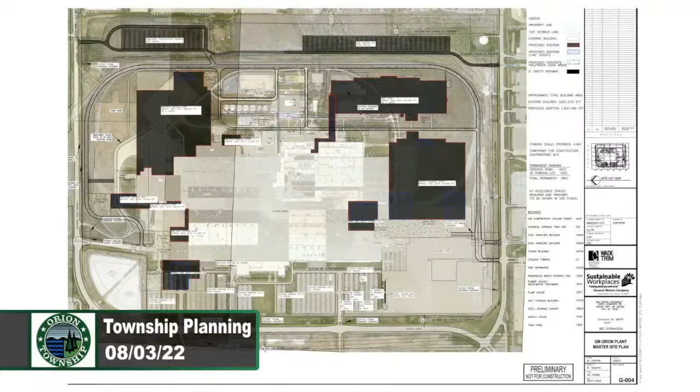All right, seeing no one, I will turn it over... I'm sorry, do we have any letters in regards to this project? I don't believe we received any, thank you. No. And I'll turn it over to the Planning Commission for any questions or comments they have during the public hearing in this case.

I have one question. What is the timing of this project? Any other comments before we switch back to the petitioner? Okay, go ahead. The construction timing is going to be starting next month, or actually this month. We're planning to get permits in place to start earthwork grading, and full production is scheduled toward the end of 2024.

All right, with that said, I believe that concludes our public hearing for PC case 2022-28, Orion BET2 plant. It is now 7:11. I would like to reconvene our regular PC meeting, which leads us to, not to be confused with the next public hearing, but that leads us to our brief public comment on our regular agenda for non-agenda items only.

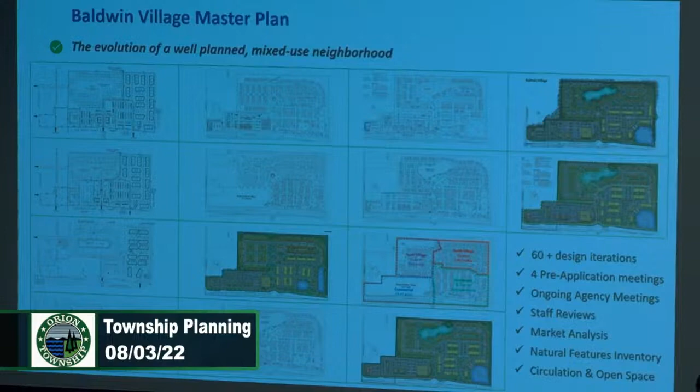Open space, circulation—again, how do we get more? How do we not just meet the ordinance? How do we exceed the ordinance? In terms of location, just so that we're clear, we're looking at about 63 acres of land on the west side of Baldwin Road, just north of Morgan. It is a hilly site.

I'll go into the next slide. It's 63 acres. We now have kind of an unusual right-of-way path down our eastern border with Baldwin and the recent expansion of Baldwin Road. We've got about a half a mile of frontage on Baldwin Road, and so we've got an opportunity to really be a gateway to the community, to be important as it relates to the aesthetics in terms of the architecture.

I mentioned we have 50 feet of grade change. We've got natural buffers on the site, which we've worked hard to maintain—not only for the benefit of our future residents, but certainly for the benefit and care of the existing and adjacent neighborhoods. We're proposing 4 points of access on Baldwin Road.

We've already started and had multiple meetings with OHM, with the Road Commission of Oakland County, understanding really what is permitted, how do we achieve a safe and viable neighborhood.

Interestingly, the traffic study that's well underway now is less about creating volume. Almost every neighborhood asks how many new cars you're going to put in the area—Baldwin Road works really, really well. What we're more concerned about in our traffic study are the finer details: how people are moving, how they're handling these crossovers. You'll see that in future meetings, the actual final traffic study and the feedback from your consultants and from the state and the county.

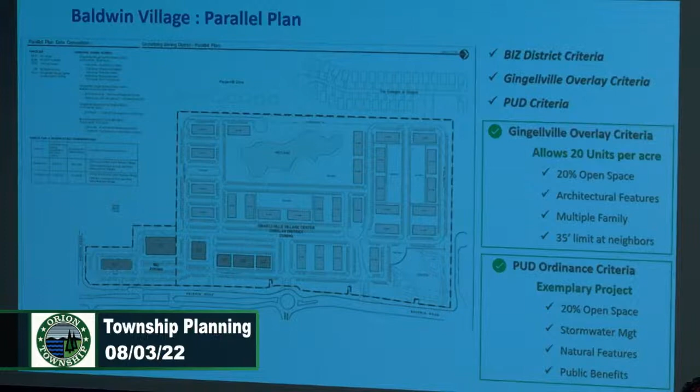We were able to demonstrate that we can provide a total of 672 residential units in a multiple family district. There's talk within the overlay district about single family, and we can get into our interpretation of that tonight. But it's realistic to say that nearly 700 units plus about 115,000 square feet of commercial could comfortably fit on this site. We can still preserve the wetlands, provide the open space, and provide the stormwater mitigation and so forth.

So it's not a great plan, it's not a pretty plan, but I think it's a good litmus test that you guys will use in your determinations, that the staff consultants will use in their determinations of what is available to this site. It's always interesting when we look at new land, it's a temptation to compare what is proposed versus the open space that's there now.

But really what the ordinance looks at is what is proposed versus what the underlying rights of that land are. And that's what this plan does. The takeaway is our density is about 31% lower than what we think could be placed on this site, and our commercial is almost 40%, 39% lower than the commercial that could be generated on this site.

Think about that. It's not only those uses, but it's the traffic, it's the parking, it's the cars, it's the pollution, it's the exhaust. So all in all, we've provided what we think is a very, very green development.

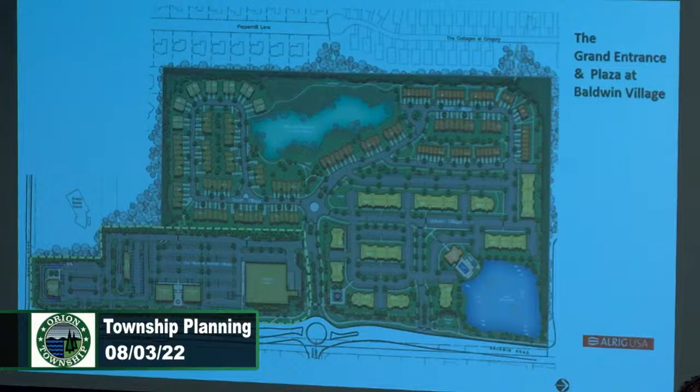I think I failed to mention Dominic Tringali, probably the best architect in the state, is on our team here. Dominic and I worked together and created what we'll see in a minute, called architectural landscape. So we've created iconic structures, images, landscape that's going to beautify and make iconic Baldwin Road and our entranceway.

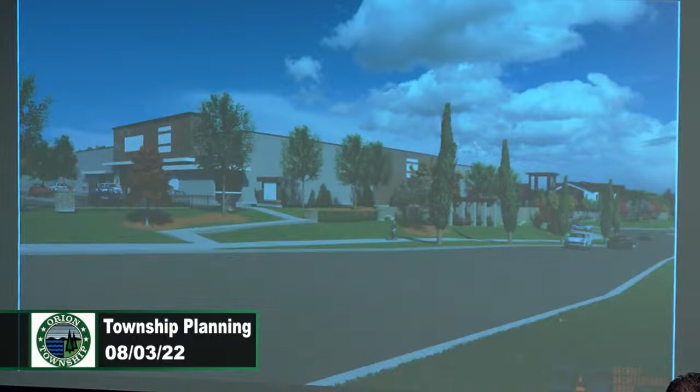This is proposed to be 45,000 square feet, about half or even a third of the size of a standard Kroger. So really a neighborhood market, a neighborhood grocer with an exciting concept. This is one area we'll get to when we talk about waivers. Your Gingellville ordinance says the largest building on this site should be 13,000 square feet. This is 45,000, so this is one of those waivers we'd be asking for within your discretion. All of our other buildings are below that 13,000 square foot area.

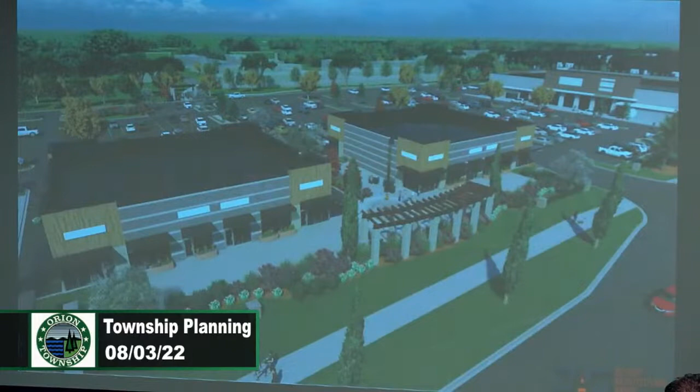As we move further south, we're showing two different mixed-use retail buildings, and I think the nice part about these are the spaces we create outside. This is along Baldwin Road. Again, one of Dominic's trellises. We're picking up all the Gingellville design style guidelines in terms of pillars, fencing, and landscaping. But what this really will become is an outdoor plaza area.

We're envisioning walkability, fireplaces, ability to have outdoor art, whatever the retailers and the community want to do there. These are going to be big outdoor spaces so people can have outdoor dining, outdoor patios right up against Baldwin Road as opposed to hidden in the back.

Here's a view from the back where we've got our parking, but what's important is that these are two-sided buildings, that we're able to walk between the buildings and create those outdoor spaces.

Here's a connection, again, with one of Dominic's trellises and that really beautiful landscape. This is leading from the South Village so people from the Cottages at Gregory, and people throughout our three villages, can all walk to these areas safely, walk back and forth, even go further down Brown Road to some of the other uses. An area of what those plazas in the middle may look like, the fire pit and the frontage along Baldwin.

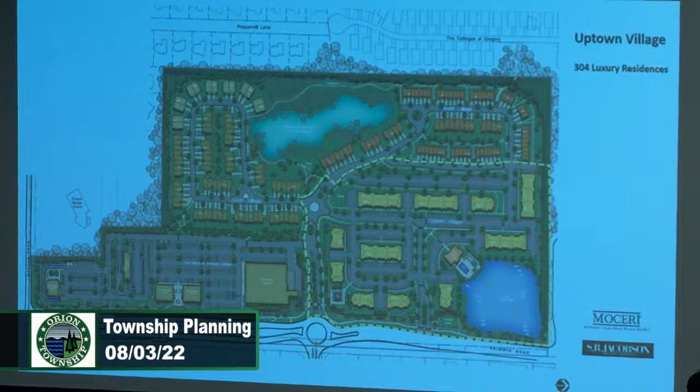Uptown Village, this is our multifamily development. What we're proposing here, again, is through the development and building and then ownership of Dominic Moceri and S.R. Jacobson's companies working together. They've done this in many locations, both in Orion Township and elsewhere, and it really is just a beautiful development. We're proposing 304 residential units within this, and really this is one of those missing middles. These are luxury for-lease residences.

Dominic can provide more detail in terms of cost and qualification, but these are, sadly, much more expensive than my mortgage. These are going to be a great development from a community point of view—homes where people can stay within Orion Township, leave their 4-bedroom colonial, and come to either this or some of our other proposed homes.

I'm sorry, I skipped a little past that. Again, the architecture is really updated, very, very cool, we think—sleek, modern, but still fits very well into the neighborhood, into Orion Township and along Baldwin Road. Many of our colors throughout each development are muted, especially as we move further west toward the existing neighborhoods. The colors get more muted as they sit among the trees, so we have less impact on our neighbors.

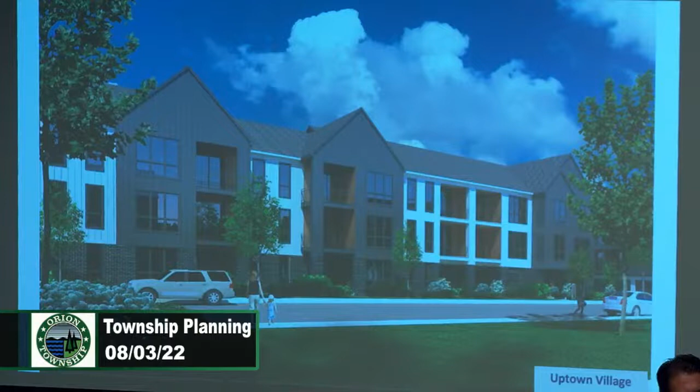Uptown Village will be a full amenity type neighborhood, with a clubhouse, big gathering areas, indoor and outdoor opportunities for parties or showers, and a pool. The pool and clubhouse will be available to all three villages. If you're a resident here, it's located in Uptown Village overlooking that 2.5-acre pond, but it's available to all of our residents. That's looking north at the entrance to Uptown Village out to Baldwin Road and Judah, at the roundabout.

The north and south villages—I'll go through these together. They're similar but different in the sense that some of their architecture is different, their site layout is different. The connectivity, the sidewalks, and the buffers to the neighbors are all consistent and very important. On the north, we're proposing 79 attached single-family townhomes throughout this darker brown area, 79 residences altogether.

On the south side, we've got three different building types—two significant differences, and one really in terms of garages, driveways, and architecture. In total, we're proposing 82 residences on the south village, so 79 on the north, 82 on the south, 161 total between the north and south villages.

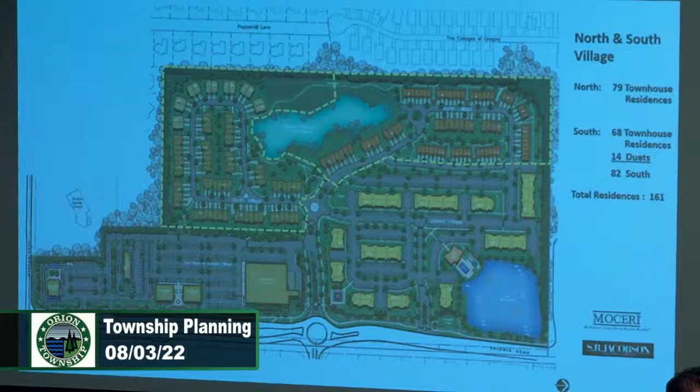About 75 feet of that is on our property, so our buildings are set back varying amounts. Our closest point right here is at a 53-54 foot setback from the property, and then it drops off further back from there. The great part about what Dominic has designed here is these are single-story ranch duets or duplexes, so the profile will be lower—not as tall as the adjacent neighbors' homes. They're not looking at a big multi-story townhouse; it's very much residential in scale and character.

These are the attached townhomes from the North Village—really great buildings, great character and architecture. We very deliberately went with this more contemporary yet traditional, kind of Michigan farmhouse, Scandinavian type architecture, as opposed to that Royal Oak brick townhome look we definitely wanted to get away from. This architecture goes well with Orion Township and our community, and really blends in well with the development and the buffers at the western edge.

Here's a look with the garage units. We'll have units both with front-loaded garages, and many units on your site plan have side-loaded garages on the end. We tried to work closely with your ordinance in terms of garage positioning—just about 50%, a little less, of our townhome buildings have side-loaded garages on their end units.

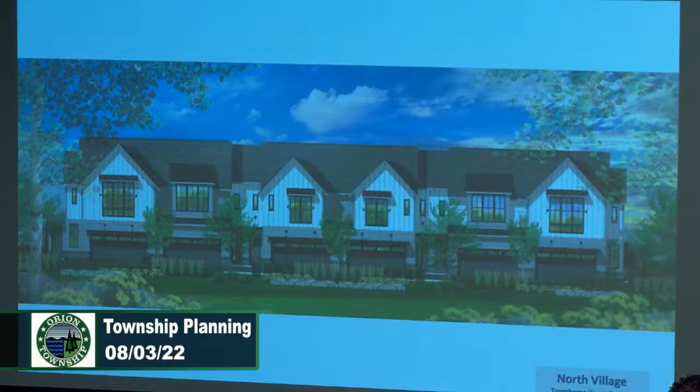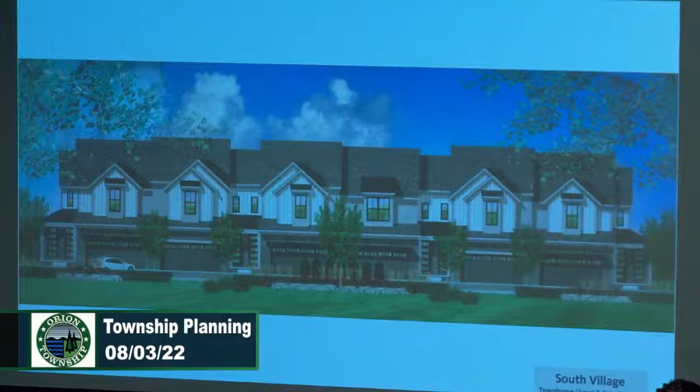Some of the different types of housing. We'll ultimately, through this process, submit full architectural plans, materials, all those different things. But we thought it was important, even at this eligibility criteria stage, to give a full understanding of what the intent is.

Here's a look at that duet unit, or two-family unit. This is an attached single-family home, a duplex if you will, residential in scale, single-story. May have a bonus room or office upstairs. So single-story living, two families. We have 14 of these units all along that southwest corner.

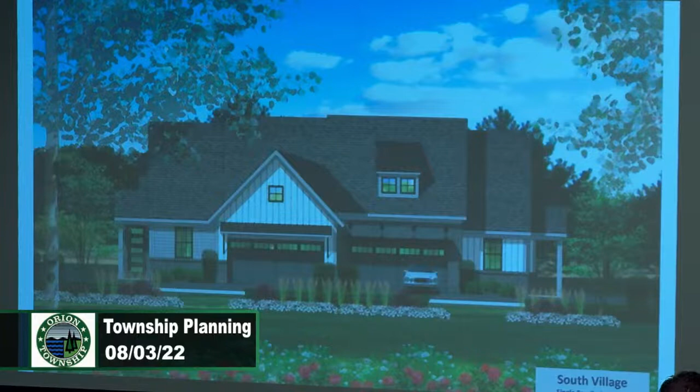Infrastructure, again, this all comes through final review, but it's important to make sure we've got it right now. We've done plans, not with this team, but with less experienced teams over the years, where they say let's just do that, and then we get to engineering and say holy cow, we can't do what we promised. So Steve Pangori, Mitch Harvey, OHM, your teams here, we've done exhaustive studies on stormwater, sanitary, and water. We talked about the traffic study. Tree surveys are underway, and wetland reports and wetland studies have been submitted.

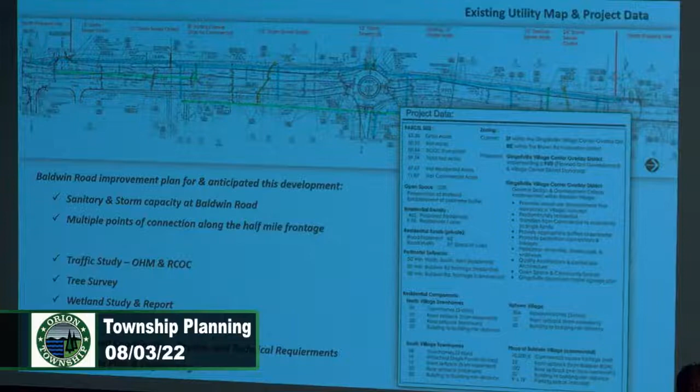We're committed to that continued coordination. It really has to work well, not only for Baldwin Village, but for Orion Township. And we know, given the homework we've done, the site surveying and the work with all the various consultants at play, right up to the state level, that we can confidently say this is going to work, and it's going to work well.

PUD has one more test, and I won't read through each of these, but it's always about a public benefit as well. What is the public benefit? Some of these are very specific, like 20% open space, preservation of wetlands; others are more intangible, like beautification of Baldwin Road and the entranceway, safety path connections, sidewalk connections, trails, and so forth. What Buzz and Randy and the team said is, is there more that we can do for the community?

So we've made the commitment, and put it as part of this package, that we also plan on working with the Orion Township safety path. We've already got the benefit that Baldwin Road put a safety path in front of this property, this half-a-mile property. Buzz and Randy said let's work with the safety path, make a contribution to it, because we know there are other areas in the township that need that connectivity.

We're also looking at, and have made the commitment to participate in, this idea of an accessible kayak launch at the camp up on Clarkston Road, right in the S-turns there. That's a really great use. We've studied the proposals for it, made that commitment in writing, and we'll continue to work with the township to understand how that happens and how we can help participate.

I won't repeat these, but I wanted to come back to them knowing I'd be long-winded tonight. Thank you for your time, but again, just to reiterate, our objective tonight is to help broadcast our belief that we meet the eligibility as a PUD, both under all the various ordinances we talked about, Gingellville and PUD and underlying and BIZ and everything else, and that we took your master plan seriously. We think this is going to be that benchmark, that we'll truly be not only the best new neighborhood in Oakland County, but certainly the best new neighborhood in Orion Township.

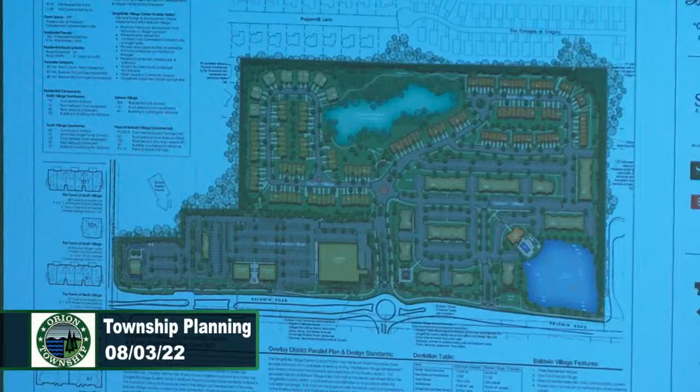Support on pedestrian as a general comment? Okay, well, I would suggest, if someone's willing to make a motion, then maybe we can at least put that motion on the table. There'll be the opportunity for public discussion of the motion. I would recommend there maybe be some conditions put forth on the recommendation, just some direction feedback that we'd like to see improvements on.

I'll make a motion, but before that—go ahead, feel free. One thing I forgot to mention is that the car wash that's proposed just doesn't seem like it really fits in this environment, this type of development. That's my own personal reaction to the project, that the car wash just doesn't seem to fit. And I would say that if the car wash project is scrapped, a mattress store also doesn't fit.

Personal opinion. Good point. What I would like to see in the commercial portion of this would be professional services like a doctor's office, dentist's office, other medical facility. If this is truly a self-contained village of sorts, something like that seems to make more sense to me than a car wash. I think the development where we're referring to the mattress store was purposely designed that way so it can be a lot of different things, but I would like to see a professional building of sort in this development.

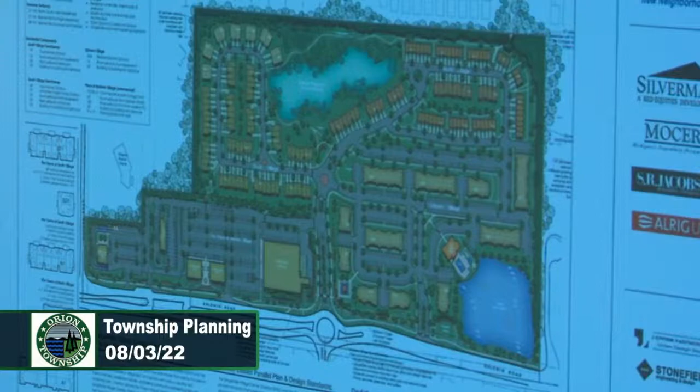You're seeing an aerial, a bird's eye view. This is one thing I've struggled with our team on. I said I'm sick and tired of bird's eye view because we're not a giraffe, and we're looking at something from a giraffe's perspective. We've got to look at it from human scale, from where you are in your vehicle, below the grade, the height of the road coming up, and this gets to the uncomfortableness and what we want to do to bring the scale down.

We're not seeing 3 floors of these apartment buildings—and I'm going to call these apartment buildings because we're trying to provide housing types and options for different affordability levels, call that middle market.

So here's a good example, if you keep the screen on. Did we lose it? Let's try that. Okay, there we go. So this presents—it's beautiful, but you know what, I don't like it, because I'm not going to ever be that tall on a crane looking at the view. We're going to be at this young lady with the carriage. What's that perspective? We need to provide this to you.

It might be some colors—I'm going to be very candid with you, it's something we struggled with. We can lighten some colors up in the next iterations and give options to this, and the dark contrasts might be something new to us. My taste level is I like French Nouveau architecture, but that's not Gingellville's either. My children think my taste in architecture is stodgy; they think this is fantastic, eclectic, all these different terms. But what I'm trying to say is we're not looking at it from human scale, and that's part of the problem. We need to do a better job, and we promise to do that and bring that to you.

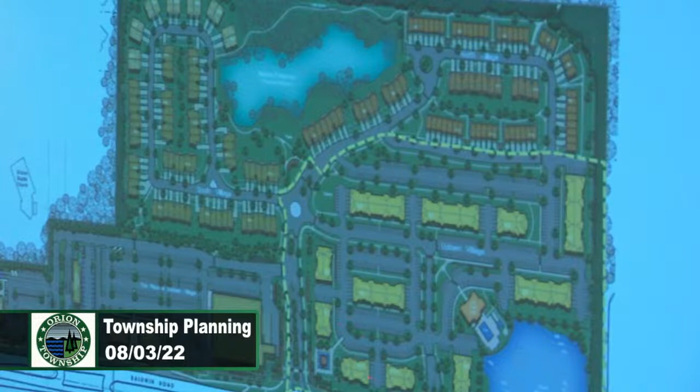So bring me another example, if we could—go to the site plan, back where we just were. This goes into, we're looking at a flat plan, and it looks like a sea of—here we go, we need to pull that up again. Thank you. So we can put stronger trees along this line. Now, this cut has to be open because that's how you enter into the parking area. But if you get the human scale, you're only going to see one floor, because this is a berm and landscaping, and then we have the trellis here.

It's going to block all this parking, but right now, from a flat plan, it's hard to see that at first glance. We could go the same thing here and everywhere else. This is so far set back, several hundred feet—this might be 500 feet back. And with the fountains and the trees, again, you may only see one story of this building.

The clubhouse—what we try to do is set the amenity reflecting upon the pond. Again, we were very cognizant of the delicate nature of reducing the bulk of these, but we put all half buildings along the boulevard and along Baldwin Road. It was very intentionally done. So we need to better demonstrate this in the next iteration, and we do appreciate your comments, Mr. Walker. I do understand it is different.

We're trying to balance the roundabout, the traffic flow, and create the different village concepts, to create that hamlet. We all think of hamlets as something smaller in size, as Mr. St. Henry had stated—hamlets typically 50 to 100 housing units max. So we tried to create these hamlets or neighborhoods within the greater neighborhood, and we just need to do a better job demonstrating this, because it seems harsh on a flat plan. But when you get the human scale, and when you have trees planted at 12 feet tall that mature to 18 feet tall, it softens everything.

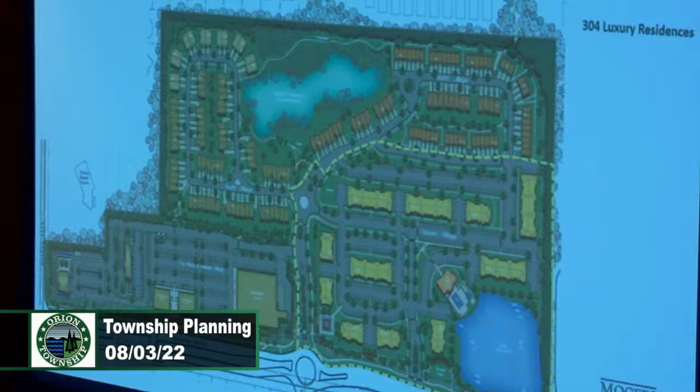But thank you for your comments, and it'll get better. I think just one item to clarify, a lot of the buffer concerns are about the property adjacent to existing uses. And I think some of the main comments on buffers are the potential for future waivers, and the distances as they relate to commercial uses. So just to clarify for future sake, but in the interest of time, I would like to provide some opportunity if there's any public comment on the motion.

If you could go ahead, state your name and address for the record, please. Thank you. Aaron Wolf, 4453 Peppermill Lane.

I just wanted to be clarified when you guys were saying about the amendment of the buffers, if it could be for all of them, not just the north and south, because there's just the 50 feet for the other adjacent areas. But I also wanted to say, I'm really glad that Mr. Mocera is helping with this, and thank you to her — earlier this week, she said, reach out to the builders, and after that, Mr. Mocera, sorry if I pronounce it wrong, even reassured that some of those homes were going to be the colors of our natural habitat for the buffers, as an addition to the buffers.